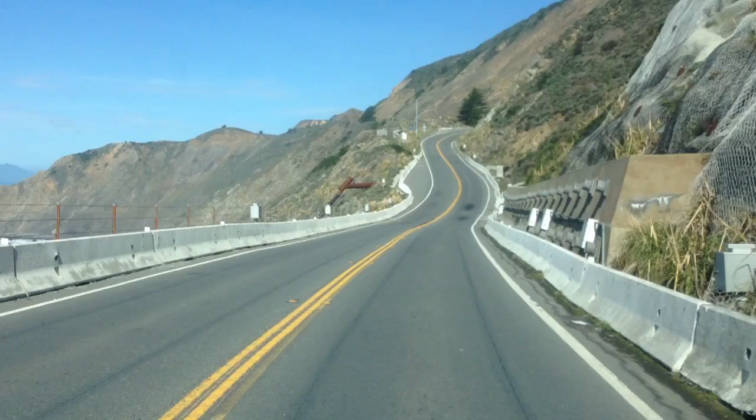The biggest benefit when the tunnel opens is perception - perception of the general public that it will be easier and faster to get to the coast. And the other part of that is safety, because there are a lot of people who tell us frequently that they will not drive down Highway 1 because they don't like driving that close to the cliffs.

I think just having this be a dependable roadway is going to be very important for us - for the county and the state in general. It's important for recreation, it's important for the businesses, and it's important for our two communities that have been separated by Devil's Slide for so long. Now they won't be.

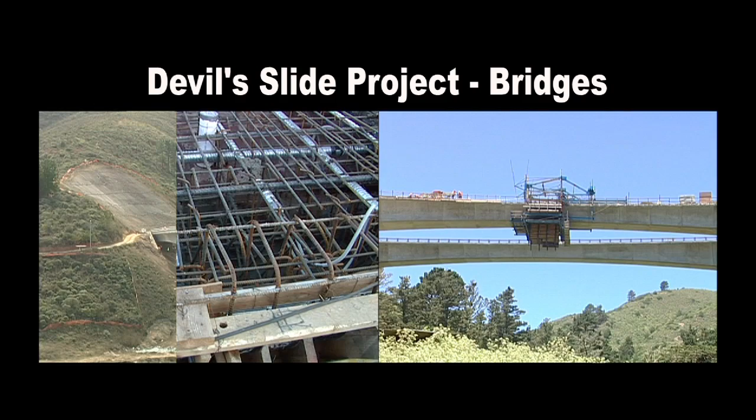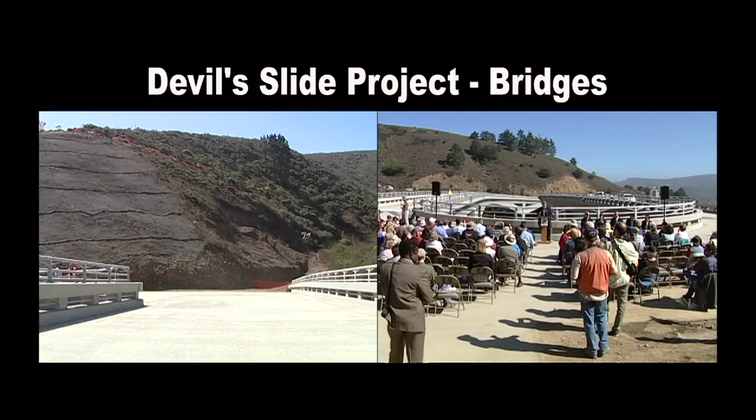In reflecting back on my design studio, what I was trying to accomplish was the mandate from the Coastal Commission - they wanted something simple, something that wasn't too loud, something that blended back into the mountainside, and basically didn't disrupt the sensibilities of people as they went by. It just was there, and that was it.

People would avoid Devil's Slide. People that live on the coast really felt the road was dangerous. So that's how we feel - you can imagine how people outside the area feel.

So I think by having a really good, safe route to the coast from San Francisco heading south, it's going to make things much easier for people to visit Pacifica, Half Moon Bay, and south of us. I think it's going to be a good thing for everybody on the coast.

The economic and tourism boost is just going to be a wonderful, very positive impact for us. We're looking at ourselves being called the gateway to the tunnel from the north end, and it's going to attract more businesses coming to Pacifica because we'll have a lot more tourists, which will help all the visitor-serving businesses throughout Pacifica.

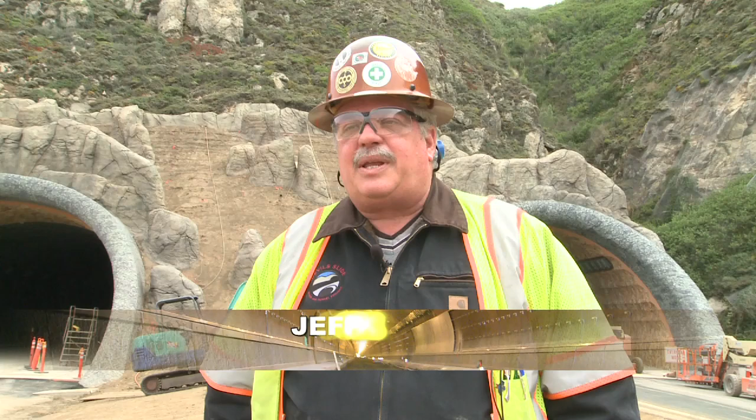We did not have any serious injuries because we worked very closely with Kiewit. That was in the form of a lot of pre-activity hazard identification methodologies, and we were able to identify those hazards and put in place safety procedures, precautions, and equipment to help reduce, eliminate, or prevent accidents from occurring.

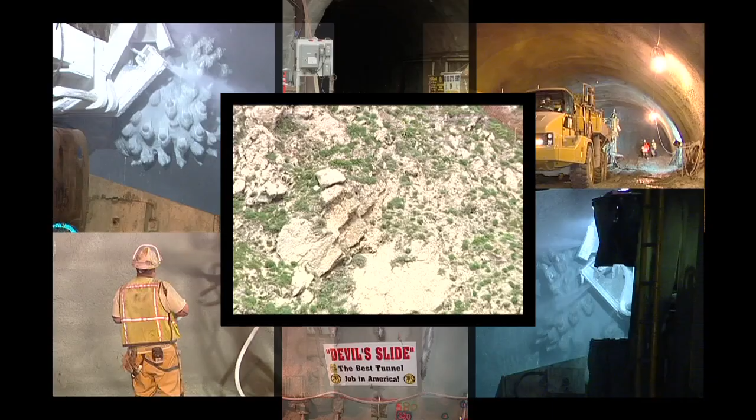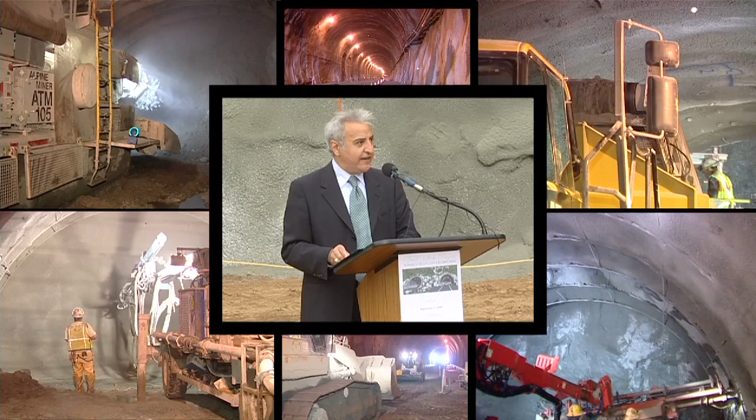Today we can all envision the beginning of the end to the disruption caused by landslides and road closings. A day worth celebrating. 4, 3, 2, 1 - let's dig it.

I think it was the day the voters approved Measure T - that was really the high point. It took the people of San Mateo County to speak up and say, we want a tunnel, and then everybody had to listen. We had to change our coastal plan, and Caltrans had to go back to the drawing boards and design a tunnel from there. The other part that was really wonderful is that we became partners with Caltrans in this solution.

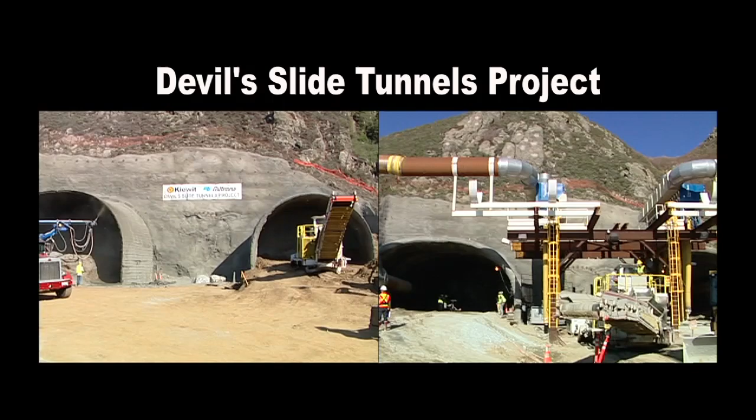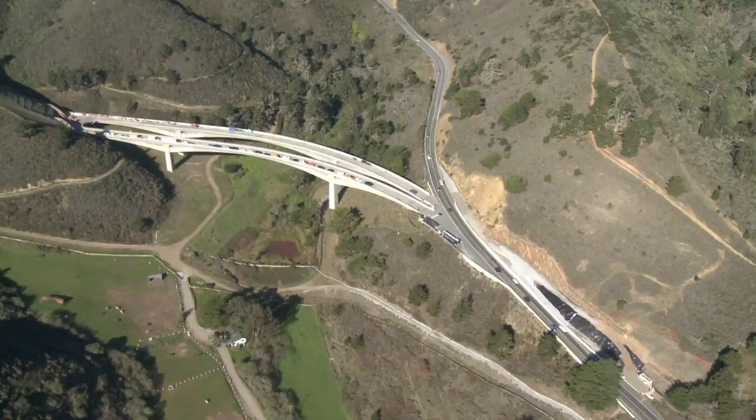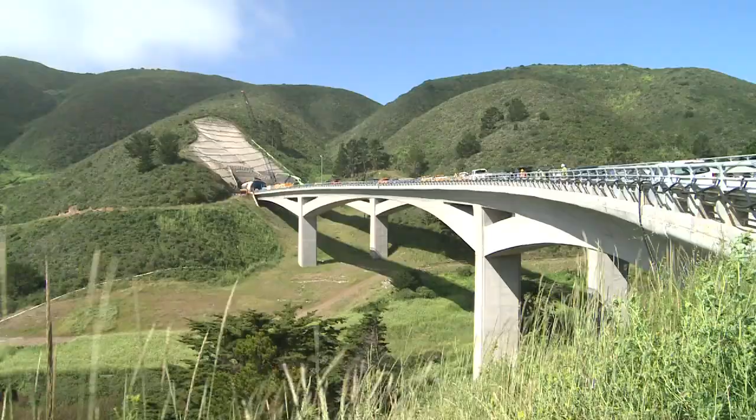This project is broken into 3 parts. We started the job with the South Rock cut, where we had to widen out a portion of Highway 1 to develop the laydown area for the future tunnel project. Our second project was constructing the cast-in-place segmental bridge over at Shamrock, which was also designed to minimize impacts to the environment.

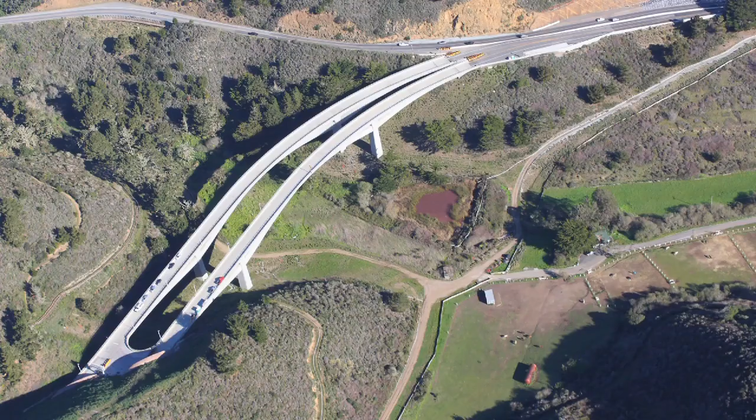Even though the biological opinion provides for an area of take, the department has not observed or recorded any take of the red-legged frog. I think we have done a marvelous job. Our team of monitors are on site every day, checking the different construction activities and looking at the areas where we could have conflict with the species. We have numbers showing the population has remained stable, not only at the North Pond, but at adjacent ponds in the facility.

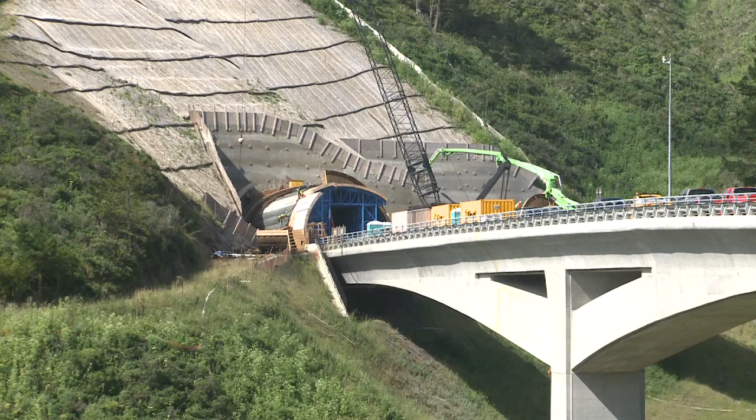Finally, when we worked on the tunnel project starting in 2007, it was a continuation of more environmental concerns, in addition to building a tunnel that we haven't done in over 40 years, using the new Austrian tunneling method to bore through the mountain here.

The new Austrian tunnel method is a process where we take little segments of the tunnel, excavate a little bit into it, and by moving into the tunnel, we're able to support it with initial support. Basically, you improve the ground around the tunnel.

In some cases, where you're in very hard rock, you may need to do very little, maybe just shotcrete the rock. As we're mining each individual round, we determine the quality of the rock as we mine. If the quality is better, the new Austrian tunneling method suggests we don't need as much support as we might if the rock were weaker. So as the quality gets better, we can mine a little more and support a little less, allowing the rock to relax a bit and gain strength as mining progresses.

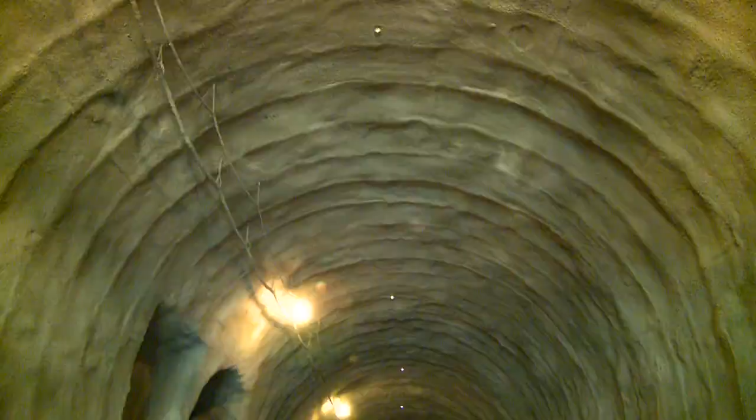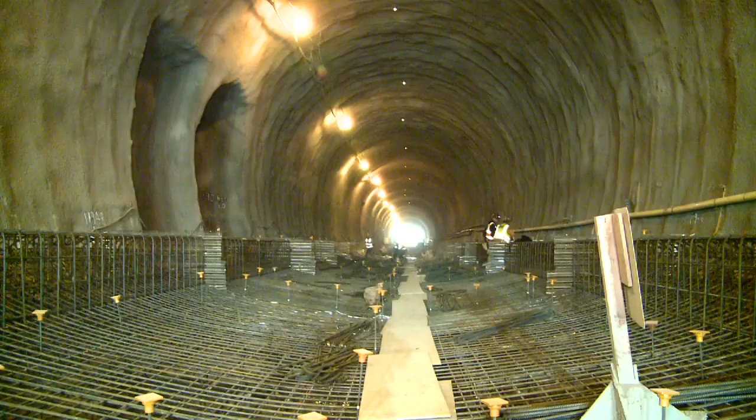That's why we mine in two separate halves. The new Austrian tunneling method, depending on the strength of the rock, calls for the tunnel to be mined in two halves: a top heading and a bench. The top heading is of a certain size, allowing the rock to relax a little, and then later we come through and mine the bench, allowing the rock to relax more and gain strength. Then we come through with a final lining that'll be totally reinforced concrete.

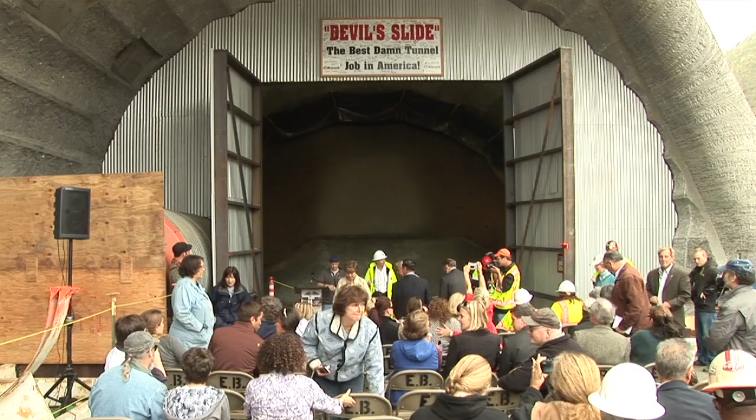I think one of the best days on the project here at Devil's Slide was the tunnel holethrough at the north portal, when we were actually able to celebrate with the community that we had finally broken through to the other side.

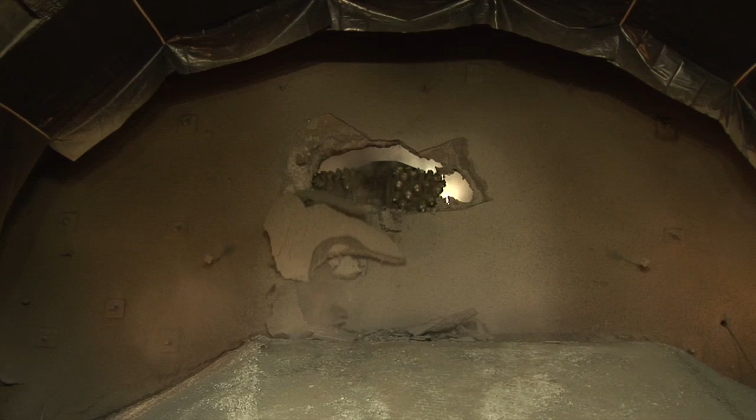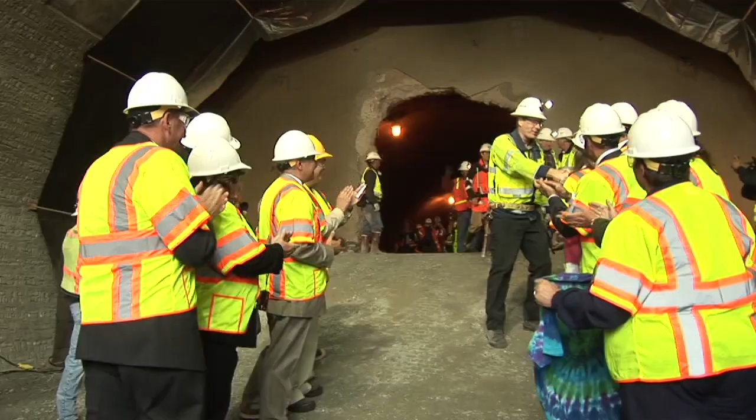It was a totally cool ceremony. I thought the best part was when they punched through and knocked everything out, then all the construction workers walked out through the new opening and got greeted by all the people sitting there.

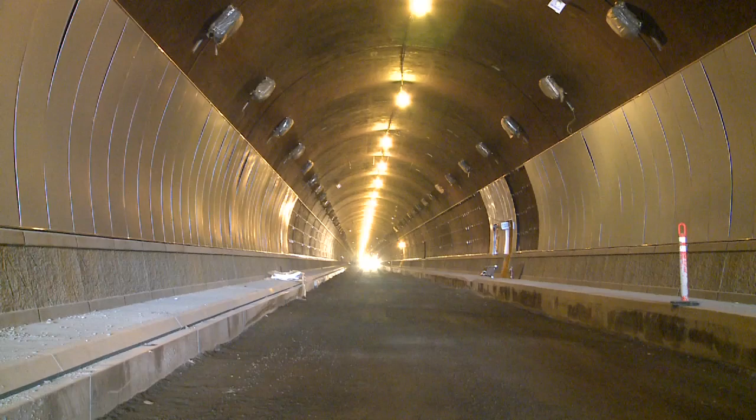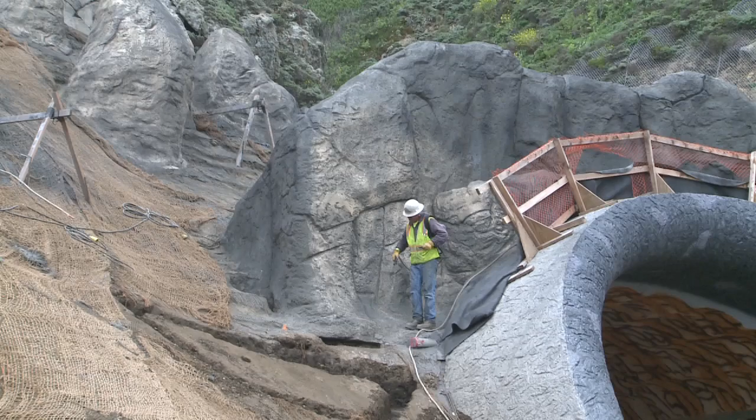Very impressed with the way the entries to the tunnel look, the south especially, because you're right up next to it. I haven't had that opportunity yet with the north end, but it's beautifully done. It looks like natural stone, beautifully done. The whole entry from the south and the north, but the south I've seen closer - it's just beautifully done. I was very impressed.

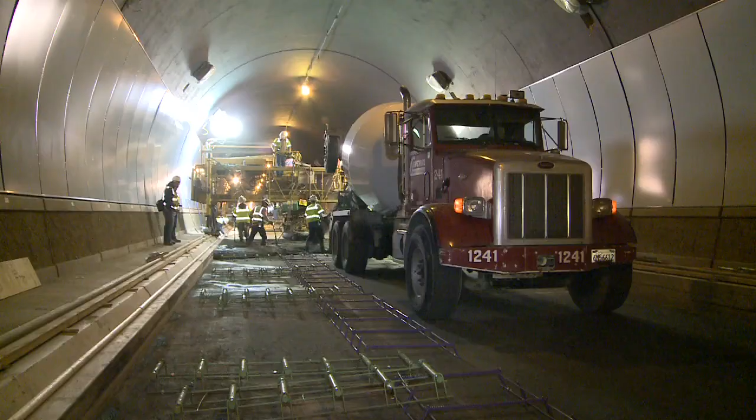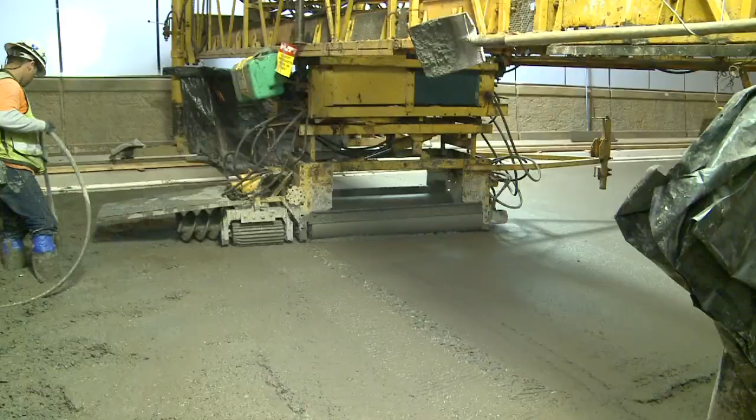This is a great achievement, a great addition to the infrastructure we have in this region and in the Bay Area. For the community, I want to thank them for their patience while we went through construction of this project. The time we took going through the environmental process, the deliberation, and the design work that was very collaborative - I think the end product is something everyone, not just the coastal community, but the whole state needs to be proud of.

The Half Moon Bay Coastside Chamber of Commerce and Visitors Bureau is so excited that the tunnel is opening this week. All of the residents have waited a very, very long time to have this much safer entrance into our gorgeous coastside, and we congratulate Caltrans for a job well done.